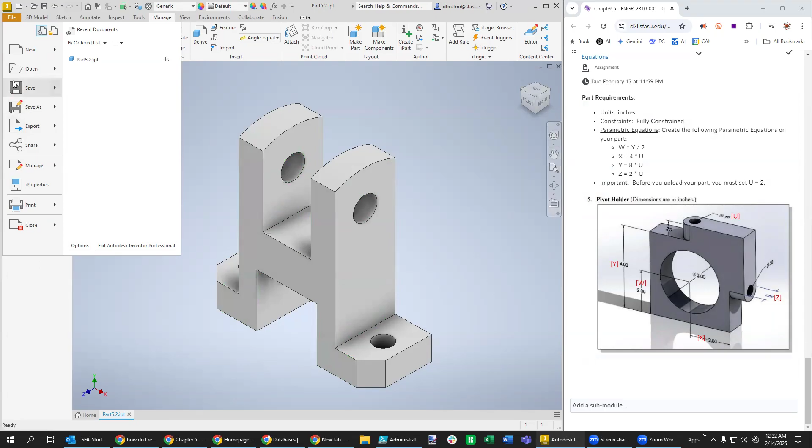And one of the things we want to first look at is what the units are. So you can see here it says units of inches and make sure it's fully constrained. So standard English inches, create. Let's go ahead and draw on the XY plane. So 2D sketch. And let's go rapidly through this part here. Let's draw a circle here and then a square there, or vice versa. So we'll start with a rectangle.

Let's make it a center rectangle. Let's see which one of those would be it. I guess they call that a 2-point rectangle. I call it a center one because you have some symmetry, locks down some of the uncertainty of things. And then we can put in our dimensions right away. This one right here is going to be 2 times 2, because that's 4 units, right?

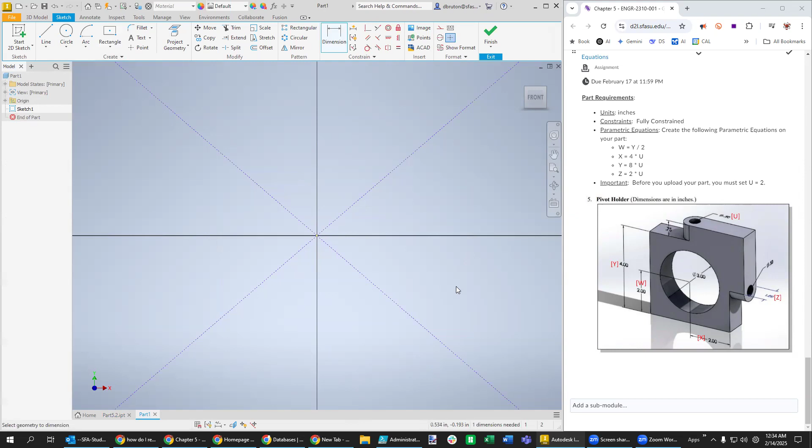Now let's see if that's going to be, that's probably going to be our known Y value. And then the W, well, it looks like actually the U is going to be the known. Okay, so we'll have to remember that one a little bit later. Okay, let's just go ahead and proceed forward with this one here and zoom back to get back to where we can see the whole thing.

Let's go ahead and make these 2 dimensions equal to each other to make sure this is a square. So this one needs to be equal to that one. We have a fully constrained part. Circle in the middle. And hopefully that only requires 1 dimension, and that would be just the radius. If I locked it into the center properly, that is. And the radius on this is going to be 3 units.

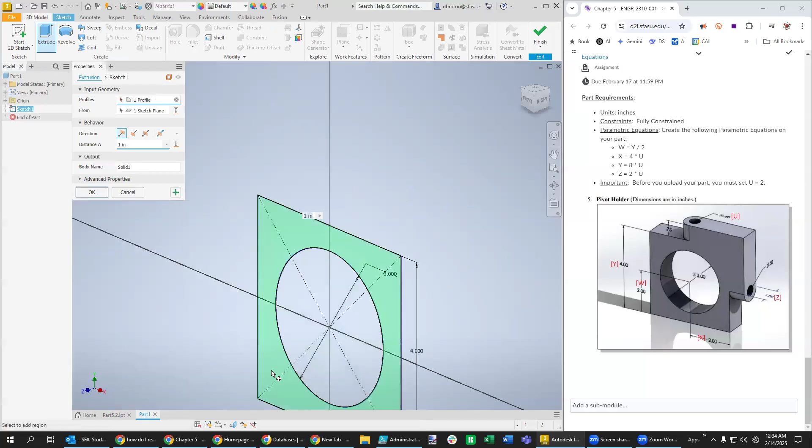Looks good so far. Time to extrude. We're going to extrude this a distance of 1 inch. At least I think it's time to extrude, right? Looks like it. And so we don't want the middle to be extruded. We want this area, and we're just going to do 1 inch. So that looks really good. We could do that midpoint extrude, but this looks like it's good enough here.

Let's draw these different shapes on the surface. So are we to assume that this is going right through the middle? I think that's a good assumption. It's 2 and 2. It doesn't really say what these distances are. So it's going to be our assumption that, yeah, that this hole goes right through the center. If they don't specify, you have to make those kinds of assumptions. Otherwise, you're not going to be able to complete the part.

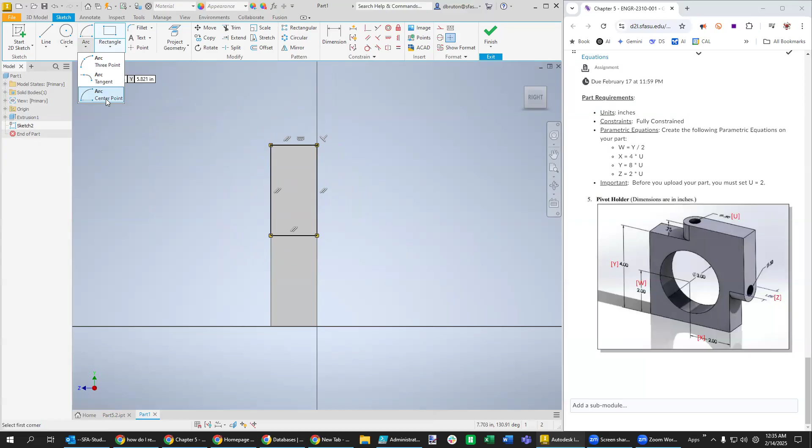So drawing a rectangle going from here, oops, maybe not that kind. How about a point-to-point, 2-point rectangle here to here? And I like how it let me kind of lock into that midpoint because that's good. Because the next thing we want to do is just maybe make a half circle, or you can make the whole circle. We'll try it this way. Going like that, locking out to the edge, get a fully defined part, then trim off the parts that we don't need, like that. Click and drag over.

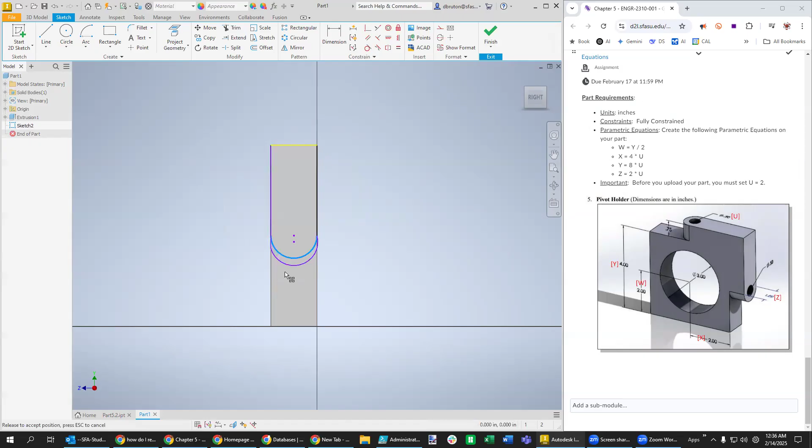And so now you can see that that became not fully defined because I did that. That can happen sometimes, and we want to look at the reason why it's not fully defined. I think if you just move it around, you can tell that, oh, they're no longer parallel, tangent to each other. So we can force this one and this one right here. Let's see, that one and that one to be tangent. And we also want to do this one and this one to be tangent as well.

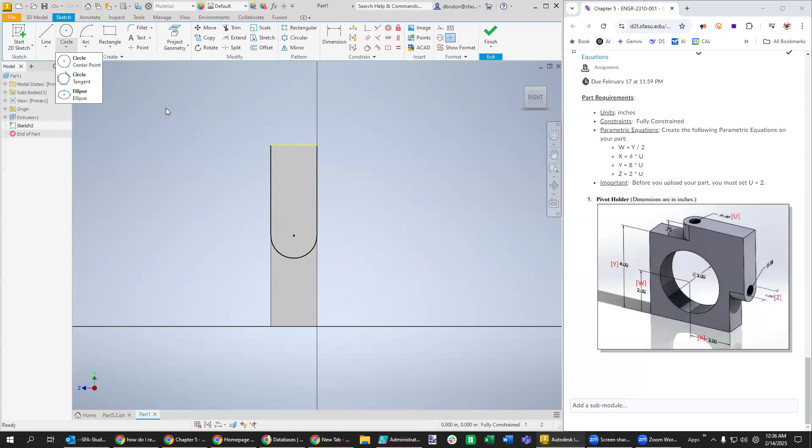And I think the reason why it's fully constrained is that we still have this in the middle, which is a good thing. We finally make our circle. It's going to be our hole all the way through, at least all the way through to the middle here. It doesn't look like it goes through the other side. So that looks to be a half on the radius.

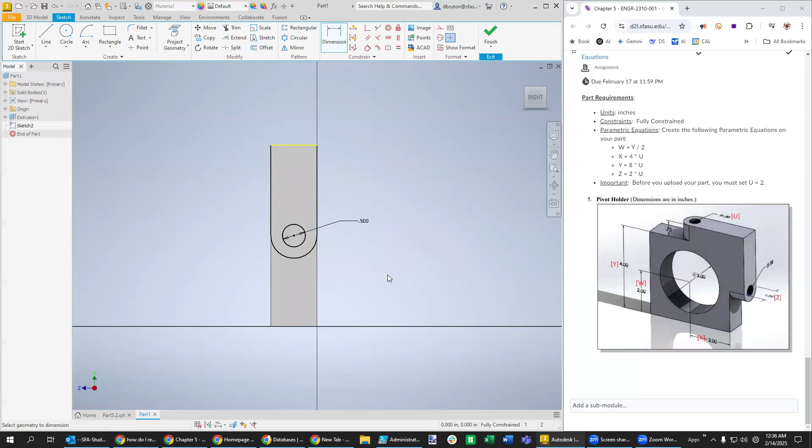0.5 looks good. So we need to do 2 things. One of them is to extrude. Yeah, maybe I did this a little bit out of order. I don't think we can do this. You know, we could probably try the same thing here. Let's try to do extrude here. And we need to extrude out here 0.75.

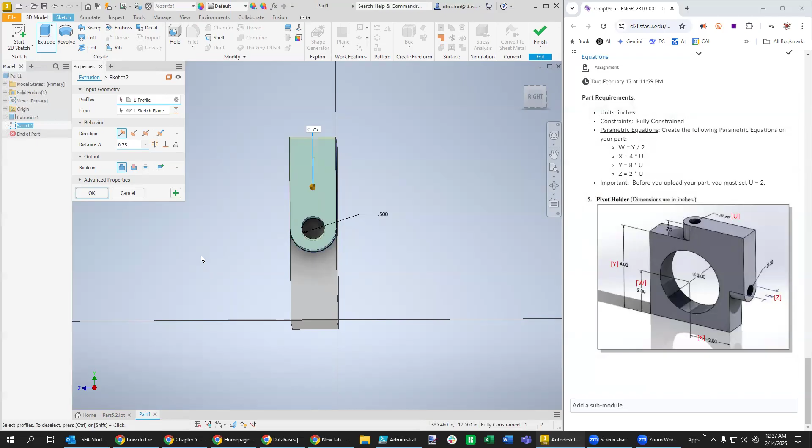And while we're here, we're going to try something else, and I haven't really tried this before. And that is to go ahead and do the cut at the same time by hitting a plus sign here and clicking right in there and say, I want that to be a cut. Now you only want it to go up to the next surface, so you can say up to next. We don't want to say through all, just up to the next thing.

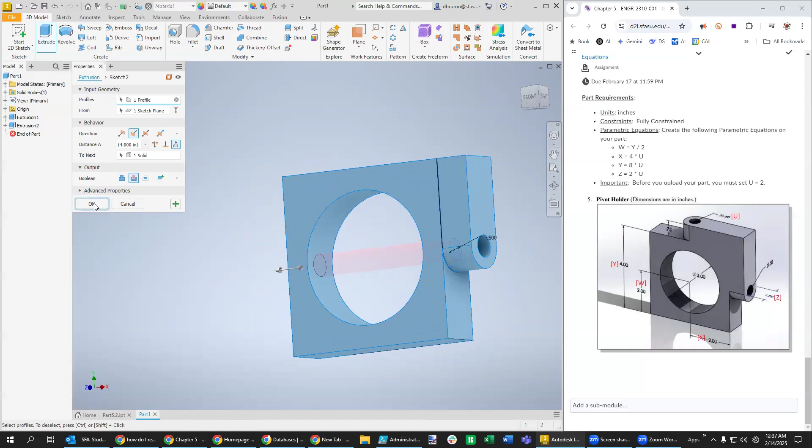And it looks like it thinks that's the surface, which I guess is okay. Yeah, I guess that's all right. Let's just click OK and make sure it looks good. Kind of makes me want to try to find some way to mirror that across there, but that might just be too much effort because it's really a mirror along a diagonal, and we're not going to bother trying to worry about that.

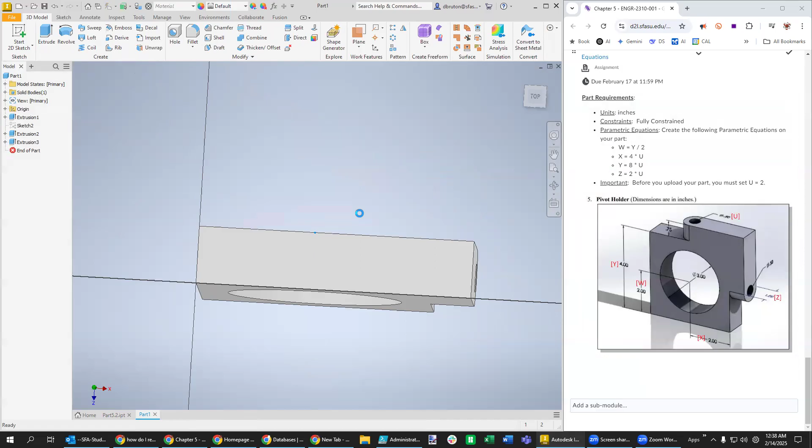Instead, what we're going to do is just draw the shape on the top. Okay, now we've got to be careful about how to do this. So we're going to right click and say new sketch. We want to go from the midpoint of this line all the way out here. It looks a little bit odd that we're calling that the midpoint because that's the midpoint of the circle, but we want to go all the way out to the edge like that.

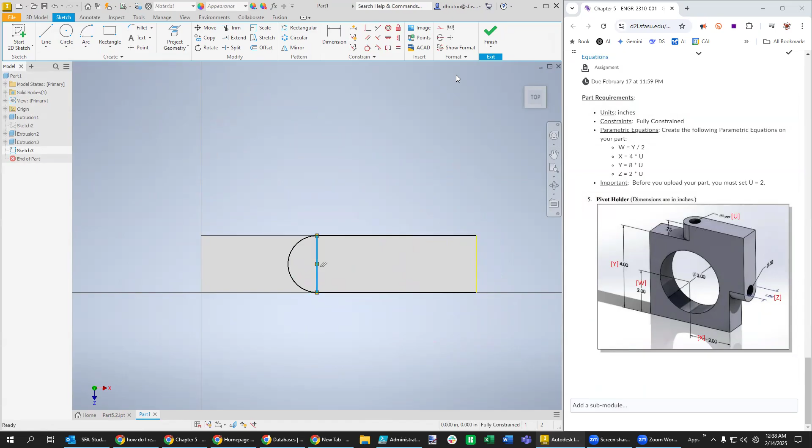Okay, and then we could try something different this time, and that would be to put a center point arc here, hover over the middle, click here, go all the way around back over to there, fully defined. I wonder if I can turn only that one into a hidden line. Look at that. That way it doesn't become part of the extrude. Making quicker work of this the second time around. So 0.5, yeah, 0.5 on that one. You still got a fully defined part.

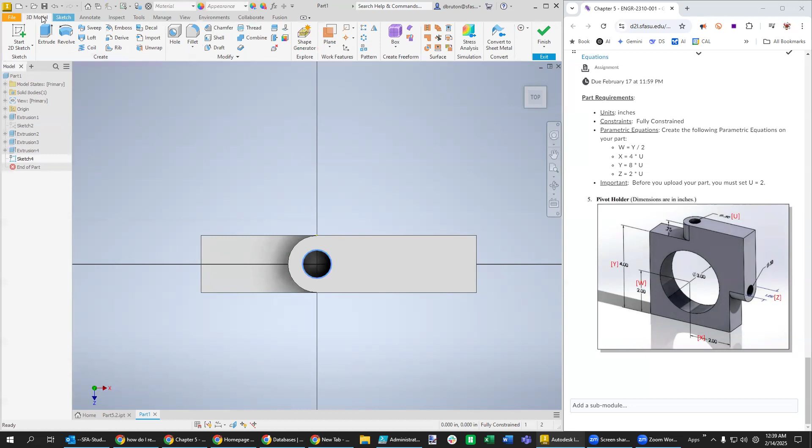And we'll do our trick again, where we're going to do two things at once. We're going to extrude this outer part a distance of 0.75. And then I forgot to do the second one. Now, I wonder if it'll let me do it at this point. Probably not. Let's try. So how about that circle there? Can we extrude cut that? Let's see. No, I don't think so. Could be wrong. Here's the sketch. Let's go back to this extrude instead.

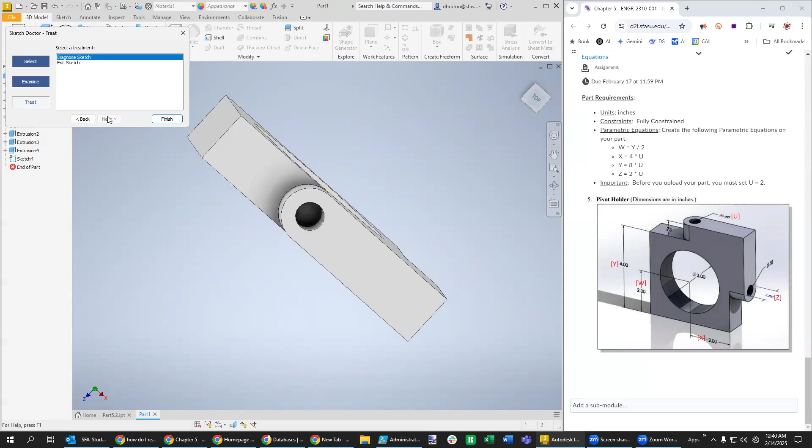So what is it saying here? No valid closed loops. So I think it got confused about what I did here. So I'm just going to try to get out of this and hit Control Z, get back to my sketch. There we go. Let's try that again. When all else fails, just hit Control Z a couple times.

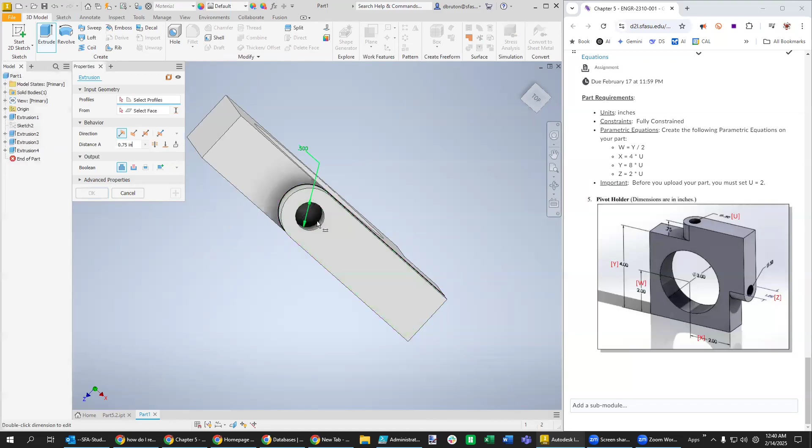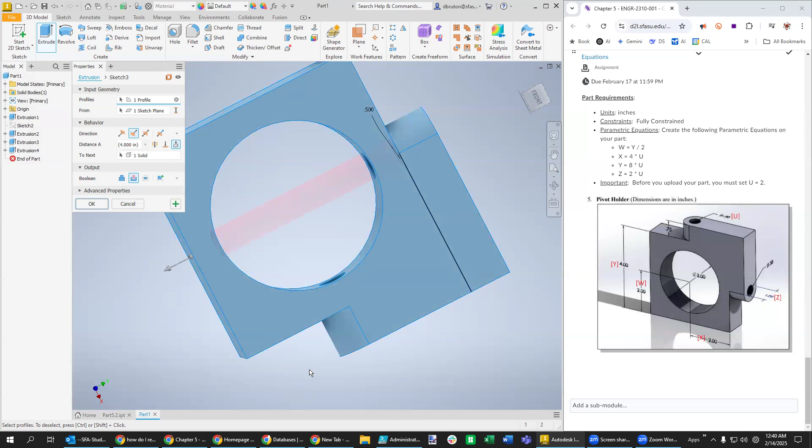That way we can do two things. One of them is extrude, and then we hit the plus sign here. We're going to do a cut for that one. Now you can see it's trying to do an extrude, which is okay. We just say do a cut. And you can even say, is it through most of it? Sure. You can even pull it an arbitrary amount. It doesn't really matter here, as you can see. But just for completeness, we can say to next. That way it has a definite end to it and we don't have to dimension that. And that is the completed part.

Looks great. Now we need to add our parametric equations. We can see that maybe U is something that we need to define first of all. We want to make sure we start there, and then once we get Y, we're going to put it up in here. All right, so the U is going to be this distance right here.

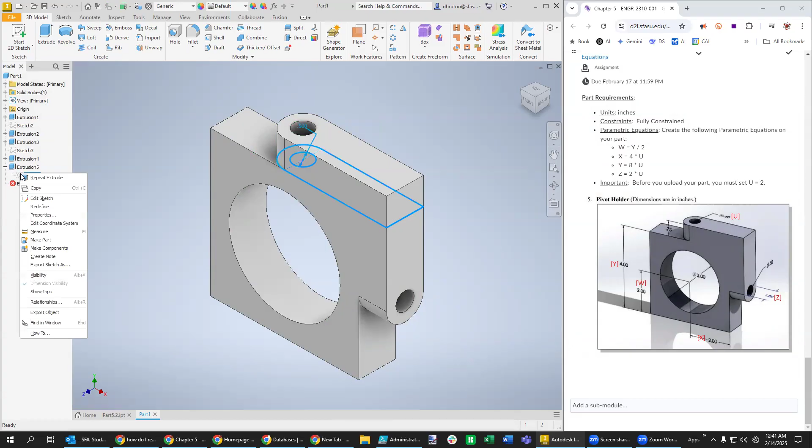So let's find the diameter of that one. We can edit this last sketch. And we can see that that one right there is the one we're looking for. It's D9. So let's remember D9 as we finish that back up again. That is our U value.

And then we're going to go over to X, which is way down here. I'm not even sure we have that one, but let's just go see if we do. Oh yeah, look at that. I don't think we're going to get both of these because I said that they're equal to each other. But we can undo that.

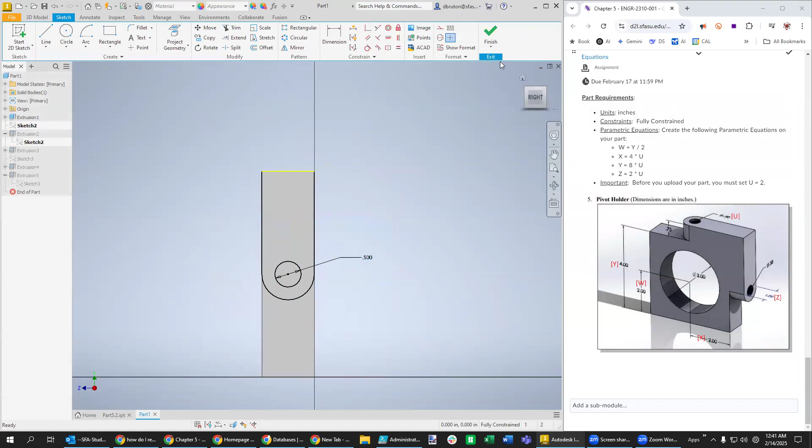It's okay. All right, so we want to go back to the initial sketch, which is this one here. Edit this one. That's not the initial sketch. Where's my initial sketch at? This one right here? Where is that initial sketch at? This one? Oh, there's my sketch down here. Okay, edit this initial one.

And because I made these two equal to each other, they're not going to be able to be kept separate. So, let's see. I can see why this is an issue here, but let's push through it here.

Maybe we can focus on this Z one first, and we'll come back to these other three. Yeah, okay, so this is the distance right here. Let's see what we got. It's 2 times U, and we said it was D9.

So what we can do on this one is look at the first extrude that we did. And that's going to be this one right here. And we can say edit sketch right here, or edit feature. That's really the one we want. And...

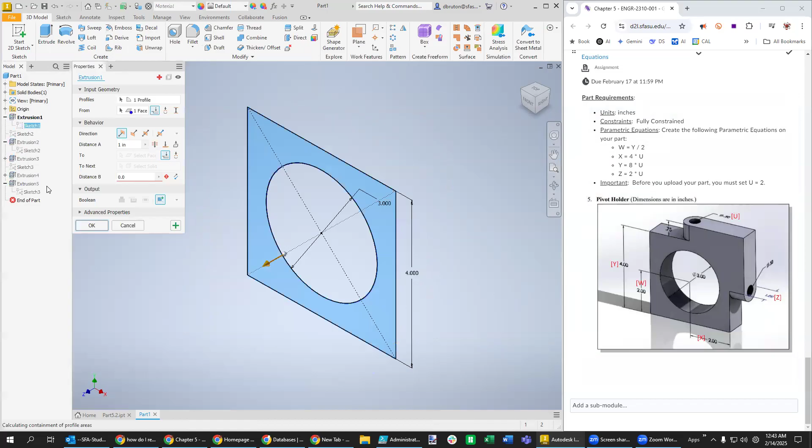What we want to do for this one, and this may not even work now that I think about it, D, I think we said D9, and then whatever that one is right there. You can see how we might get a circular reference on this one. But let's move forward here just a little bit more before we say that there's a problem with this.

We said Z needs to be 2 times U. All right, so then times 2. Let's see if this leads to a circular reference. Looks like it's okay. So to test it, what we can do is come back over here to this radius right here.

Edit this right here, edit the sketch, and then change this one right here to 0.75. And what we want to do is see if the other thing changed. Yeah, it's got that cyclical dependency there.

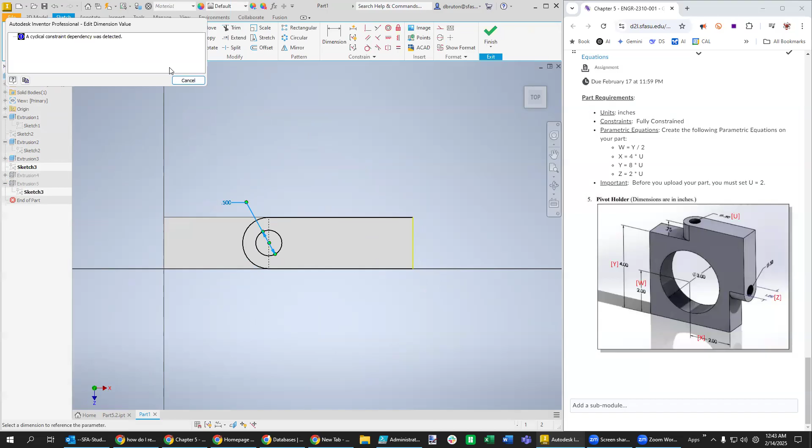So probably need to change this up a little bit. So I can see why that would be a problem, because this one relied on that first thing that we did. Okay.

Now, as you can see, I formatted the problem so that it's doable, because what we're getting was cyclical references because of one thing depending on the other, in a cycle kind of way.

Now let's make sure that I don't have any parametric equations before I go in here and try to redo this. So again, we can go to tools or manage. There we go. Let's just kind of look for anything that has that.

And so we have D2. Let's see, normal value. Let's see, I can't even remember what that was to begin with. So I think I'm just going to assume that that was the 0.5 distance. So we'll put that back in there. And let's just see if that's going to work. Nope, that was not it.

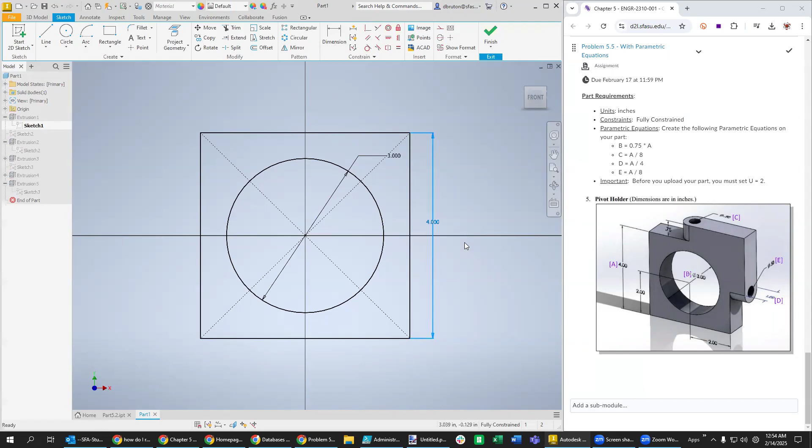All right, so let's just start with figuring out what this big size was right here. So if we go back to the sketch, edit like this, and this one right here is D0. So everything is going to depend upon that, as you can see here.

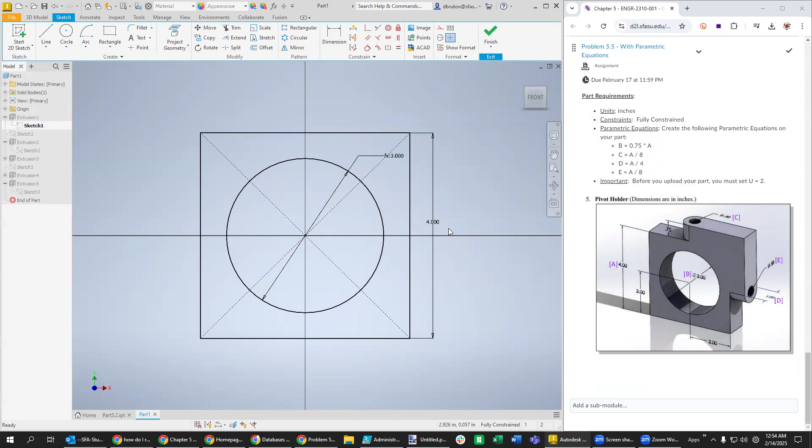So let's go to the diameter right here and say that's going to be D0 times 0.75, basically 3/4 of it. And we'll make sure, caps lock off here, that it's still going to give us 3, but making it parametric. All right, let's not forget that this one right here is D0 as we're moving forward.

So we're going to click OK. And it already changed those other two because of mistakes I made. But let's go in there and just change those equations, and I think we'll be fine.

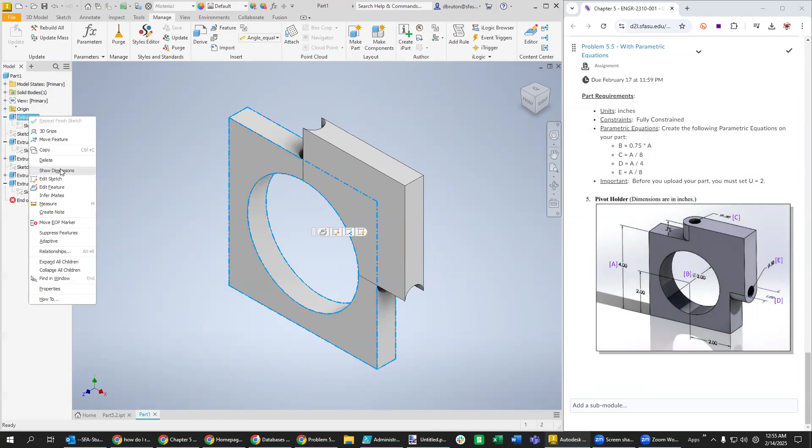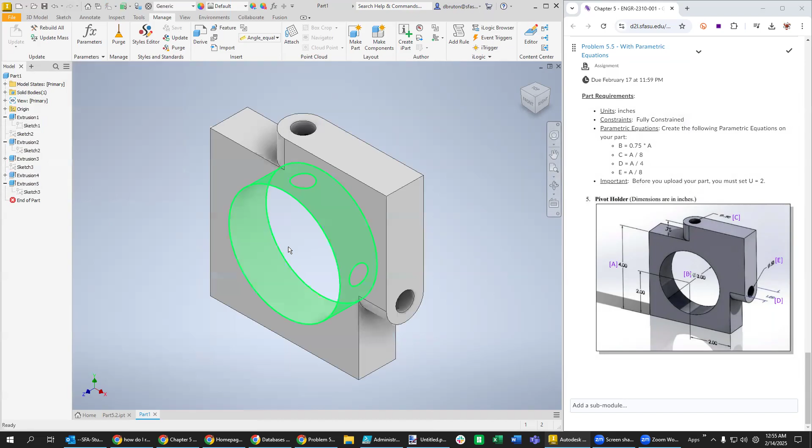So this one that's D out here, that's the extrusion depth of this one. We're going to say edit feature, and I think it should have been a width of 1 to begin with. But what we really want it to be now is D should be equal to the distance A, which is D0, divided by 4. Let's see if that brings back normality to it. Sure it does. All right, so we got A and B done, and D.

Let's go ahead and put these two hole sizes in. They're basically going to be 1/8 of D0. So let's edit the sketch that's corresponding to each one of these. There's one. Edit the sketch right there. That needs to be D0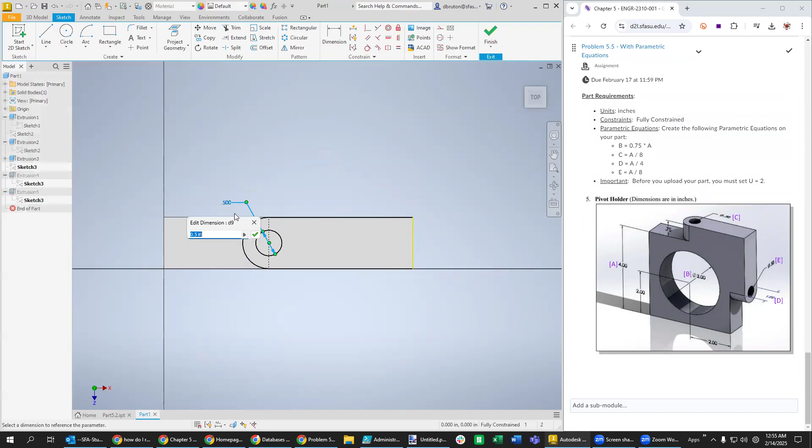divided by 8. I'm going to copy that because I'm going to need it in a minute. And then go ahead and roll those changes forward and then do this other one as well. So this sketch was probably, let's see, it's going to be this one. There it is, edit. And we'll paste that equation in right here.

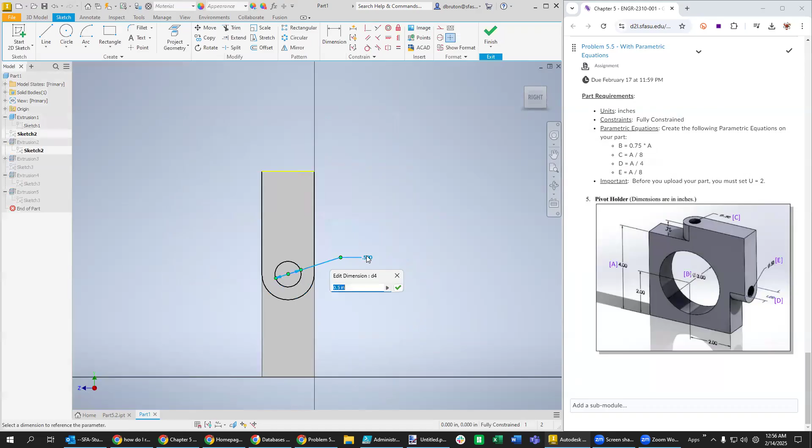Now to make sure everything worked out properly, we're going to go back and change our original size. That's the D0. But instead of going back to the original sketch and doing it there, let's try a parametric equation option here. So if we filter on just those that have equations with them, we have D0 right here.

So let's just try to change this as it says right here. I guess I got to go in there and change that because there's no U in this equation. So let me pause the video and put a different value in there. Okay, and then it says A is equal to 8 there. So let's go ahead and change that to 8 right there.

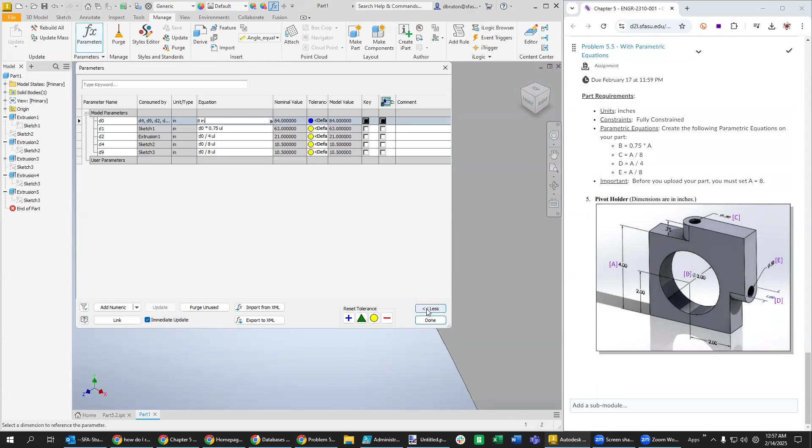Oh, didn't like that. And we can put inches in there, obviously. Let's just see if it will roll things forward as we begin to make that sketch. Oh, we can even see that off to the side like that. And it looks like it just basically made it bigger in all respects. I don't know about the arc—yeah, I guess it made everything bigger.

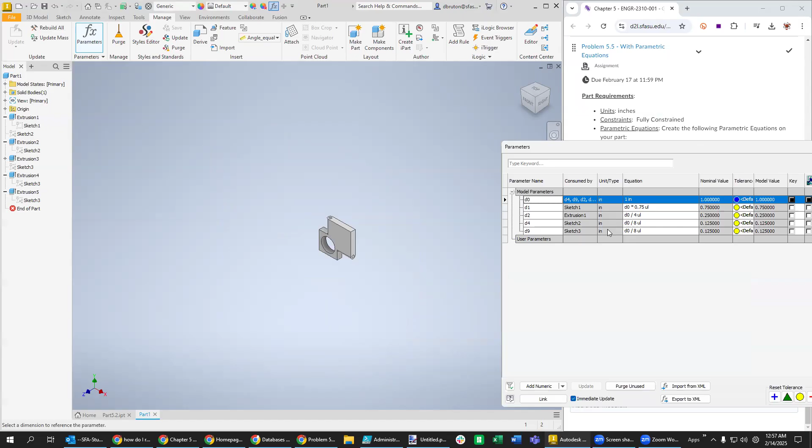So if we go back down here and just put a 1 in there, see, okay, there is where the differences are going to be right there for sure. So the thickness of that height right there is something that wasn't parametric. So if we go in here and do something like 10, we'll notice this right here gets thinner and thinner. And if we did something like 50 and then zeroed in on that, we can see this right here is going to be really thin.

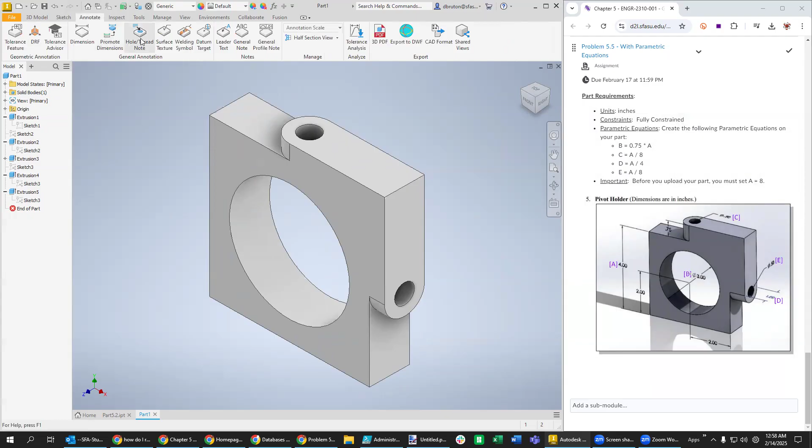So we do want to leave it where the problem says to do that—that's 8 inches, zero in on it right here. And just for completeness, let's go in here and do promote all of these dimensions forward. Oops, wrong one. We could go in like this, maybe select all of it, pull in those geometries.

Oh, excuse me, got that on camera. And so we could do all of these just to make sure everything is included, but then you realize, well, we don't really need these right there. So you know what to do from here. Make sure you move these until they're visible, and also don't show as many digits as are shown here.

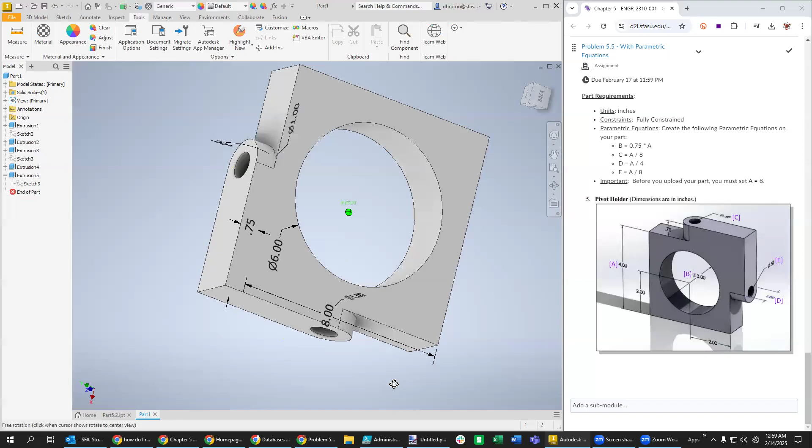Just like this. All right, let me know if you get stuck on any of these parts here. And do remember to go in here and finish the cleanup of this process, making these dimensions that are on the back side come over to the front. Now, one way to do that is to extrude backwards instead of forward, or just give it a different view. Probably not like that one. Let's always leave it like this, but try to promote all of these dimensions toward the front if you can.